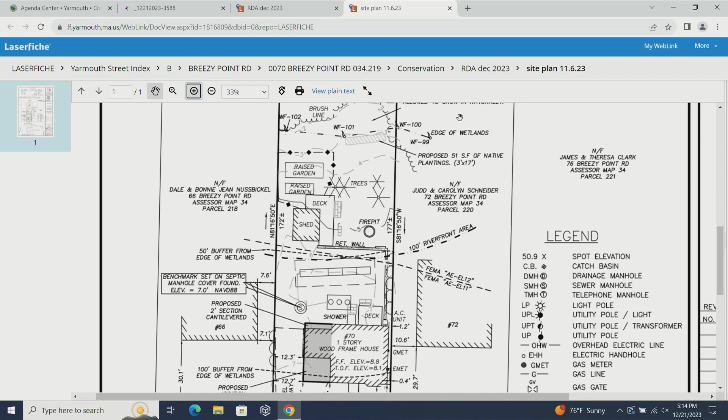We're going to have 140 square feet in the riverfront area, between the 100 and 200-foot zones. There is no proposed work within the 100-foot buffer to the riverfront. On the wetland buffer, we've got 0 square feet of proposal between the 0 and 50-foot zone, and 110 square feet in the 50 to 100-foot area.

As I said, we're proposing mitigation at 2-to-1, with 50 square feet of plantings adjacent to the wetlands at the rear of the property, over an existing lawn. There was some area in the back that was disturbed, so we're allowing that to grow back naturally. It has been cleaned out—there was some debris in there, so we cleaned that out. Other than that, I'd be glad to answer any questions you may have.

Questions from the board? Ellie? No, thank you. Brittany, anything? No questions. Anybody in the audience have any questions or comments on this project? Anybody on Zoom have any comments or questions?

If not, and there's no further discussion among the board, would somebody like to make a motion for a -2 and a -3? I'll make it. Thank you. Is there a second? Second. Thank you, Pat.

A roll call vote is required. Ellie? Aye. Pat? Aye. And the chair votes aye. Passes unanimously. Thank you for your time. Merry Christmas, everybody.

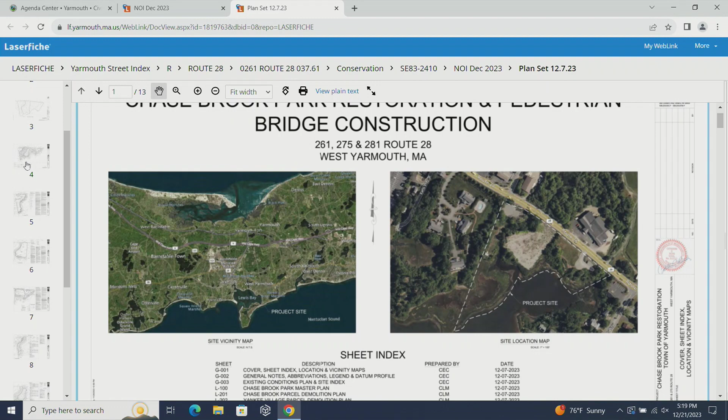We are representing the town of Yarmouth. We've been working with them to plan for the restoration of 3 separate parcels into one park, Chase Brook Park. The properties are the existing Chase Brook Park, Mill Creek Park, and the former Yankee Village parcel, which sits between those 2 parks and was recently demolished. Those are all located on Route 28, and they border Chasebrook and Mill Creek. There's a portion of Chasebrook which currently separates the 2 parcels of Chase Brook Park and Yankee Village.

Chasebrook and Mill Creek, the 2 parks on either end, currently feature existing parking areas, overlook structures, concrete and asphalt path systems which are in various states of disrepair. There's turf areas, some ornamental plantings, and naturalized edges with different levels of invasive vegetation as well as native vegetation. Following the demolition of the structures and paving on the Yankee Village parcel, which took up the majority of the parcel, that site is currently covered in wood chips, some invasive plantings, trash, and debris.

There is a salt marsh which borders the edges of Mill Creek at all 3 properties. The goal of the project is to create a more cohesive public park which utilizes all 3 of the parcels, provides better pedestrian access within the park, areas for the public to engage with and view the waterfront, as well as restore the degraded vegetation to a more healthy, ecologically beneficial state for wildlife and the quality of the waterfront. In order to do that, we created a new walkway system by removing the old walkway system.

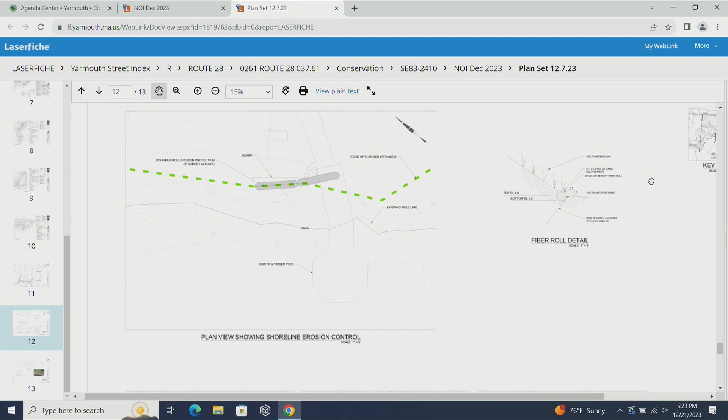In addition to the pathway system and other seating areas, the main goal of the project is to restore the currently degraded vegetated communities to a more healthy system that supports wildlife. To that end, we would be removing invasive plantings and restoring with native plantings, adding a more biodiverse planting palette that'll help attract and support more wildlife, in addition to the invasive plant removals.

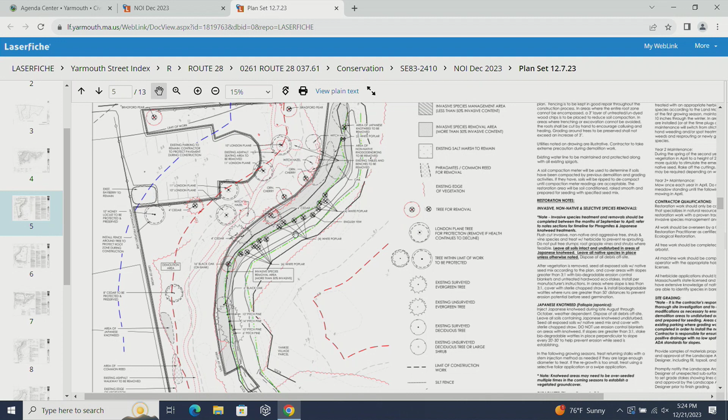The design team and committee recognize that this is a public park intended for visitors of different backgrounds and interests. One of the biggest challenges as a restoration company is that the public perception of naturalized areas tends to be that they're messy. So we tried to come up with ways to address what the public would like to see in a maintained park, while still meeting the goals of restoring the native habitat. To do that, we designated several view corridors where the taller vegetation would be managed to help enhance views in those locations.

And those are shown with those dashed lines. There's one at each parcel.

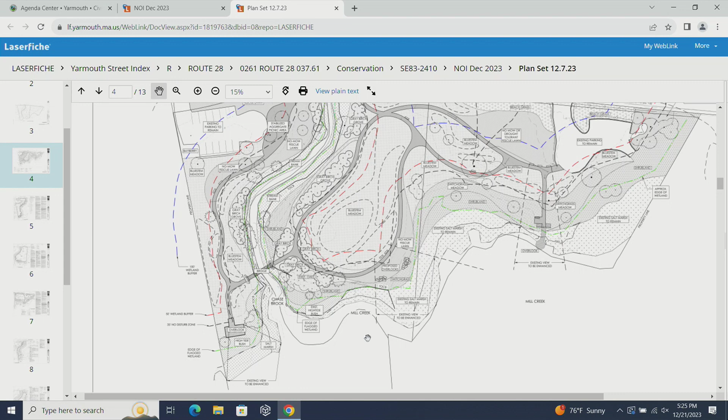Instead of a traditional turf lawn, we've incorporated a more environmentally friendly low-growing lawn in several locations using a low-growing lawn alternative called No-Mow Fescue, which is a blend of 6 different drought-tolerant fescues that don't need to be mowed on a regular basis.

Not only does this type of planting not need regular maintenance, such as irrigation, fertilization, or mowing, but those practices actually do more harm to that type of plant community than they do good. It grows very low, it's tolerant of foot traffic, and it would help provide a more maintained open feeling to some of the areas where we have the proposed walkways, picnic areas, benches, and hopefully allow for better engagement by the public within that park system so that they have areas that they feel they can inhabit alongside the naturalized areas.

This is a low budget and eco-friendly way of maintaining those areas.

Also, there's an area of turf at Mill Creek that may need restoration during the construction process. So we have proposed that damaged areas are either replaced with a drought-tolerant turf grass, such as Black Beauty, or the entire area, if budget allows, would be transitioned to the No-Mow Fescue.

And then for the rest of the park, we've created separate areas of recognizable plant community types that are intentionally layered and woven around the edges of the parcels.

For example, the existing salt marsh has Phragmites in it. The Phragmites would be treated and mowed. That would help the health of the salt marsh. It would also help the public perception of what this looks like aesthetically.

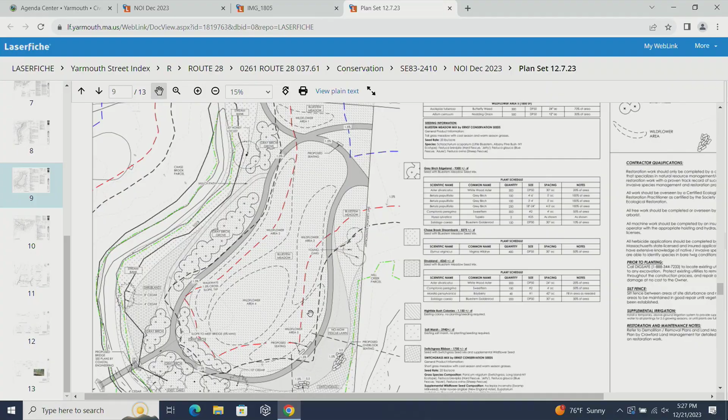And I will let Tori from Coastal Engineering present the pedestrian bridge design and add any other comments that he might have.

Currently, we're proposing to do a bridge with a 40-foot span that's only 5 feet in width. The idea is to keep the bridge as small as possible so that it is not getting in the way of any of the views, and used only to connect the pathways.

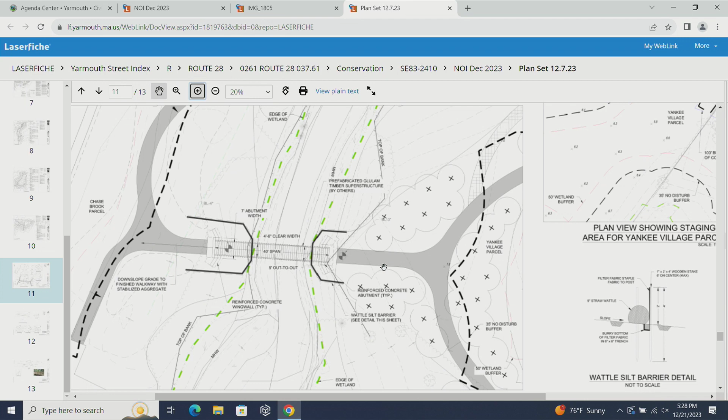That's really it, other than unless you have any questions.

What was the resource area that's in? Is it BVW? Salt Marsh, Coastal Bank, Riverfront area. The bridge is over Salt Marsh?

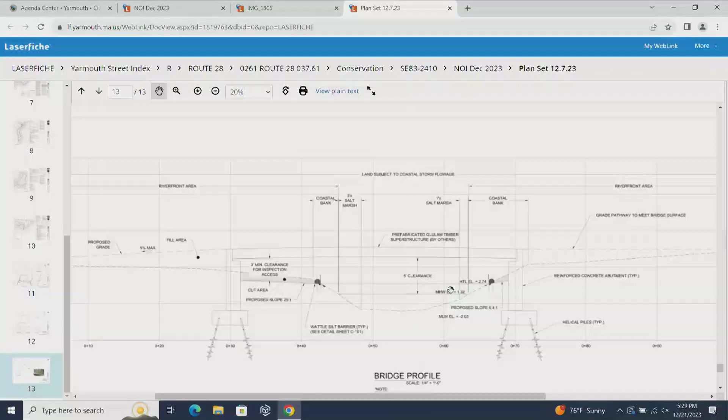Yes. Okay, and what's the profile for that? For the bridge? What's the height of the bridge? The clearance, let's say it's 5 feet over the mean high water to the lowest chord.

Can you explain how the pathways have been brought up to meet the bridge in order to get that clearance? On the left side, we'll have to add some fill to bring it up to meet the bridge. On the east side, it'll come straight across to meet it, but it'll also require some additional fill.

We're not going to grade anything outside of the pathways with anything other than what is being proposed for the rest of the lawn. It'll maintain the 5 foot.

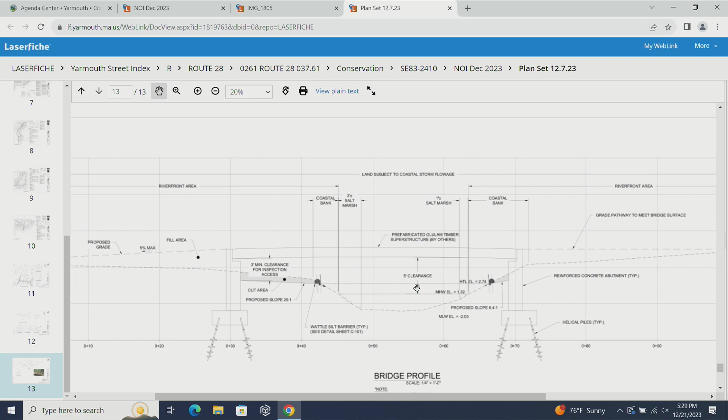I think it's actually probably stabilized aggregate, meadow, and then embankment plantings. So there's proposed blanketing on any of the steep bank areas that are existing, but there's no proposal for additional.

I think you had asked earlier about gravel. There's no proposal for gravel on the banks.

Okay, and the decking of the bridge is just planks? Yes, wooden planks, yes. Okay.

So we are proposing that the spacing only be a 1/2 inch to be ADA compliant. That's the requirement? We would be requesting a variance for that. Okay. Yeah, because normally we would ask for 3/4, but if it's an ADA requirement, then obviously we would have to go with that.

Yes. There's also a southern exposure there, so we're hoping that that would help. Yeah, you're a lot more beneficial that way. Yeah. Okay.

And what was the name of the lawn mix you're talking about, mill? It's called No-Mow Fescue. It's Fescue by Prairie Nursery.

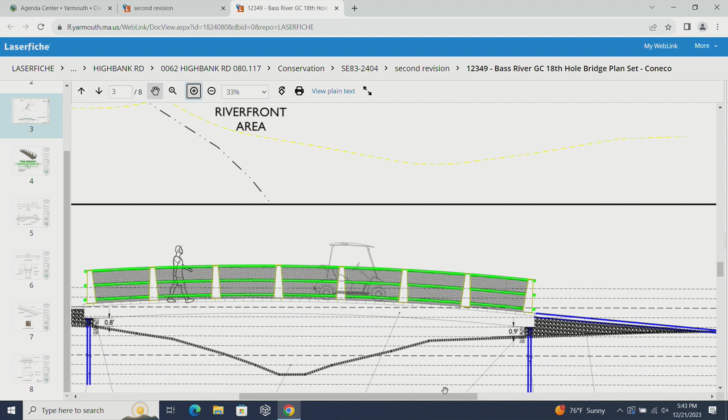Because of the height of the bridge, we also had to add railings on the side, since the bridge is high enough and narrow enough that we were concerned about cart paths going across. As you can see in this diagram, on either side of the bridge is where it meets the existing path—actually over the existing path and up into where the path was before, because the old bridge wasn't 48 feet long. This one is.

So we're actually meeting the path further upslope, and we're doing a fill on either side of the path so that we bring the path elevation up as you come down from the tees and go up towards the green, to meet the new bridge elevation.

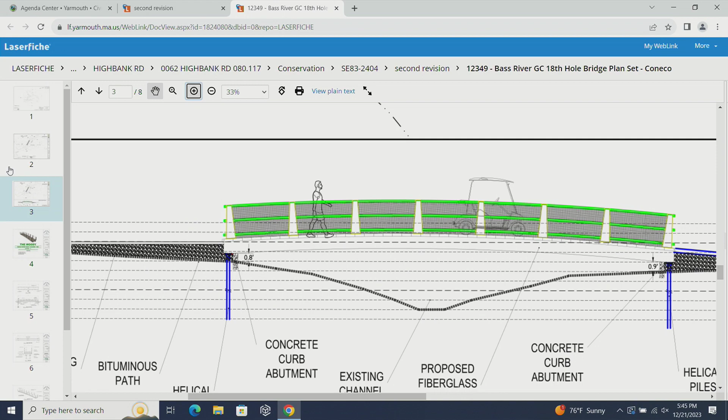We'll have vertical curbing on either side of that path, because there's a drop off, especially toward the green side—about a 3 or 4 foot drop off coming off the bridge. We didn't want to just splay out a 2-to-1 or 3-to-1 slope fill, so we decided to go vertical. There will be curbing so carts don't go off the side, and that'll also retain the path material. The path is in previously developed Riverfront.

We're on the existing path. We're not expanding beyond what was previously developed. We're no closer to the river—matter of fact, we're further away. We've also proposed to take out some paths that become unnecessary because of the bridge crossing going back in, and restore those with native vegetation, all within Riverfront.

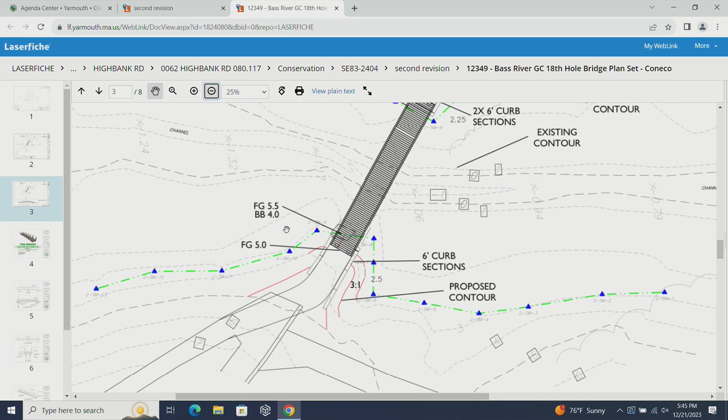Okay, questions from the board? The paths that you're taking out, what were they composed of?

One is a gravel path, another is partially seashell, and there's a little piece of bituminous concrete too. In the letter I wrote, I detailed the total length of the path—it's quite a distance. As I recall, there was some area of path coming into the bridge where underneath there was concrete or bituminous asphalt paving. So the approach coming down from the tees to the bridge has asphalt on top right now.

Yes, we're actually going to go back and meet it further along. So there's going to be a piece of area where there was asphalt before that won't be there now because it's under the bridge—we're going to meet it further upslope. The other side was always seashells or gravel, and we'll maintain that.

Anybody else? Ellie, any questions or comments? No, I don't have any questions, thank you. Okay, Brittany?

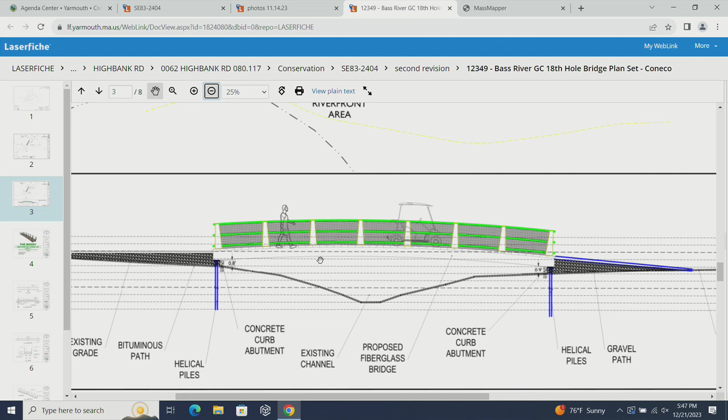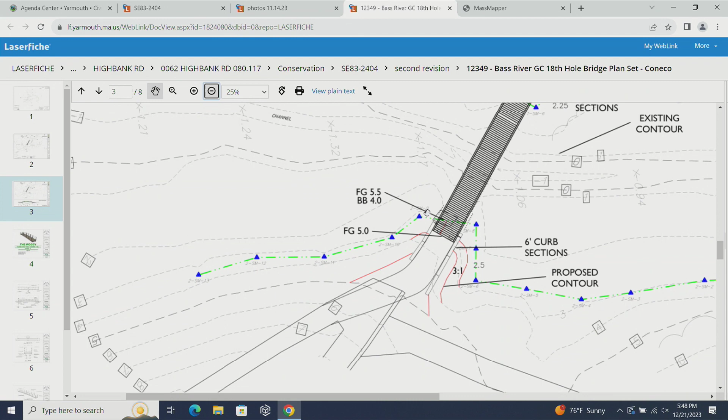If you go back to that diagram for a second, you can see where the salt marsh is and where the bridge is—see the blue triangles? So the bridge ends are actually outside of the delineated salt marsh area. And if you recall, some of that salt marsh vegetation is sitting on top of bituminous concrete right now, because it was previously filled for that seashell pathway.

And for the slopes, the 3-to-1 slopes on either side, are those going to be seeded and blanketed, or how are those going to be done? Yes. I didn't see that in the description. Okay. Tim, the landscape architect, is also on Zoom if you want to talk to Tim Garish.

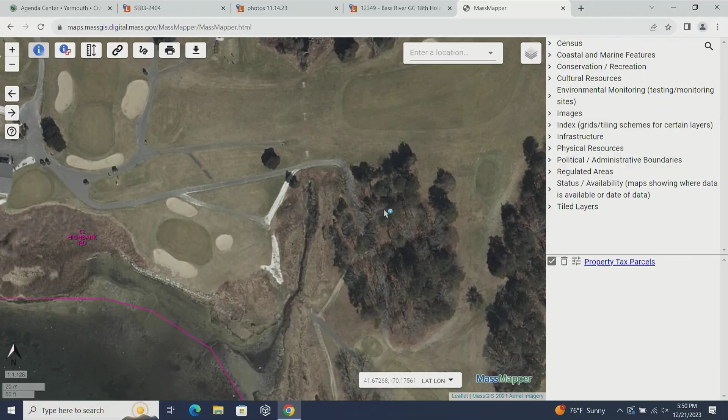We've been fortunate so far that no one's been injured severely, but it's a requirement that we try to improve golf safety on the golf course. So it's a really important issue to resolve.

In addition, those paths were created to try to alleviate the problem when the bridge was destroyed several years ago, which delayed its return. Most of those paths are going to be reclaimed, so they'll go away, and that will allow you to get back a lot of the areas along the sides of the marsh.

So we would appreciate it if you would take all that into consideration. It's a real big improvement and a real big safety feature to protect citizens and golfers in general. Thank you. Okay, thank you.

Anybody else? Anybody on Zoom who wants to make a comment on this project, raise your hand digitally. Don't see anybody. All right, is there any further discussion among the board?

Okay, would somebody like to make a motion to approve the project with special conditions? So moved. Thank you, Pat. I'm having pen problems here. Did you second, Jack? Thank you.

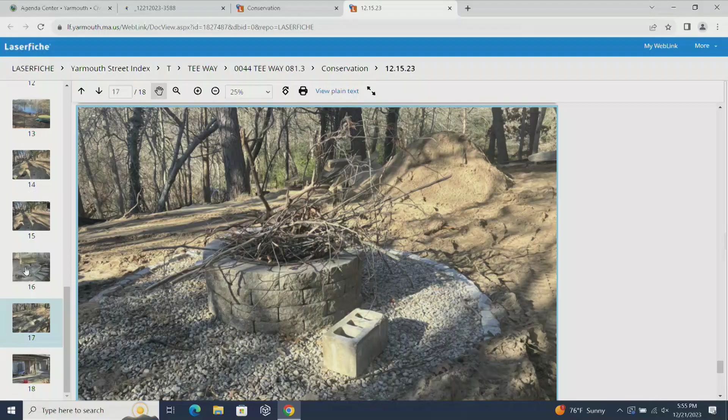There was a report to the building division about this violation, which is how conservation found out about it. This is located right abutting the golf course, to the north of the golf course on the pond there. The homeowners had a failing timber retaining wall, which they replaced with stone, and same thing with a failing timber stairway, which they replaced with stone, as well as installation of a patio.

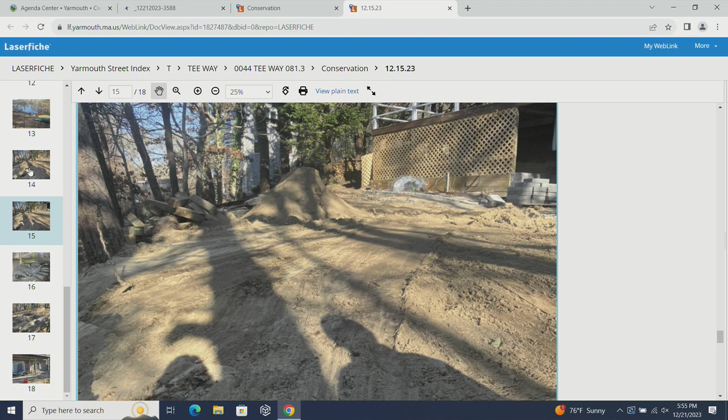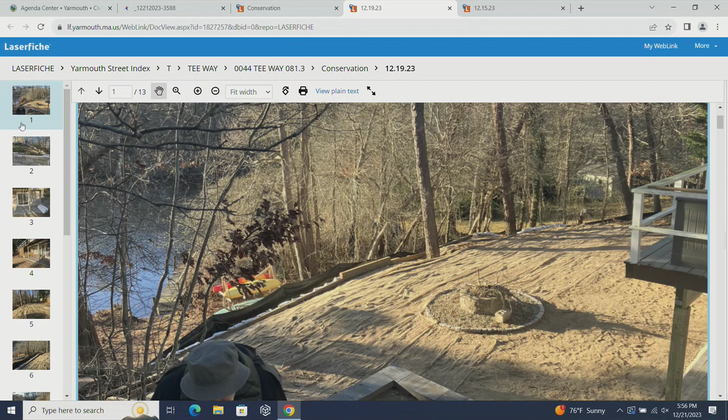This is all within the 100-foot buffer zone to a bordering vegetated wetland and the pond there. They also did some regrading in the yard, which led to a lot of exposed soils, and historical cutting could be seen on the areas below. I met with them on site during the installation, and over the weekend before those big storms, they were able to install silt fence as erosion control, along with some jute matting on those open soils.

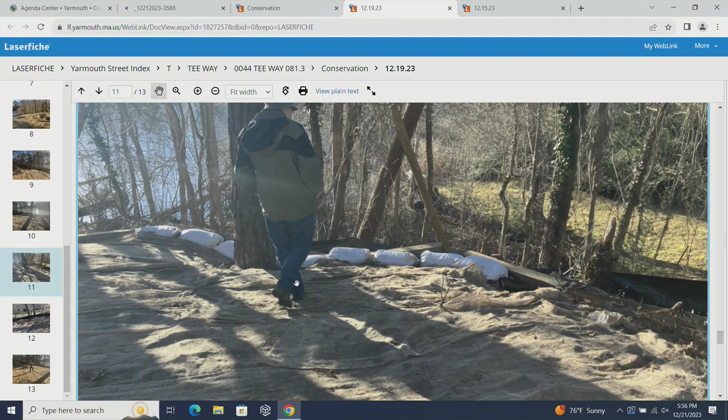There is a smaller retaining wall at the bottom of the slope here before the stairway. Let me see if I can find that one. Right at the top where the silt fence is, right underneath it, there's a small wall with two timbers holding that slope up, and that was installed last year.

I will find it. It did not look like... yeah, I was going to say, it looks like this, it's got a lot of holes underneath it, where it's been undermined and recently installed. So that's what's going on at 44 Tee Way.

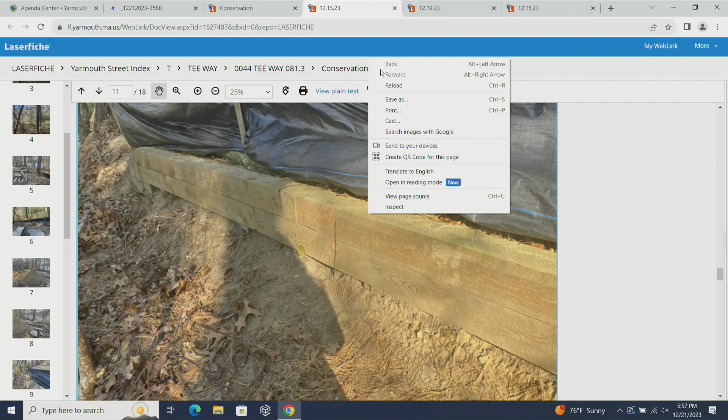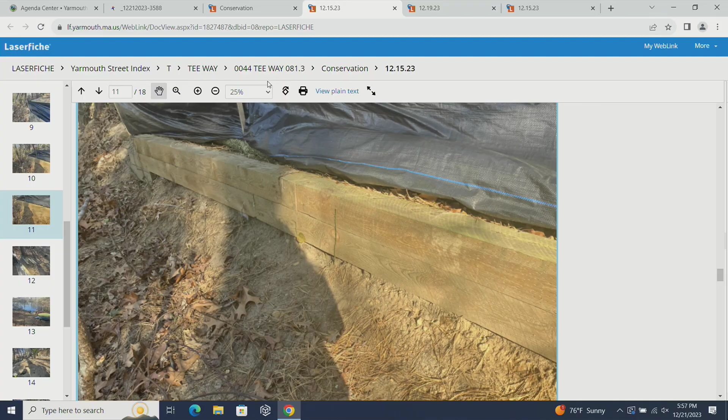Seems like you'd have to do a little bit of engineering to help that lower wall along. You might have to add another course or two, step it down in front slightly, I think, because otherwise water will run under it.

It's clearly not structural, and it doesn't seem like it's holding back a huge amount of soil, but I think if they planted on top and in front of that lower retaining wall, that would be something we could permit.

I think you'd also want to address this, because it looks like some pretty bare stuff all the way down between the pond and this lower wall here. So I think that certainly needs to be restored, that area should be restored.

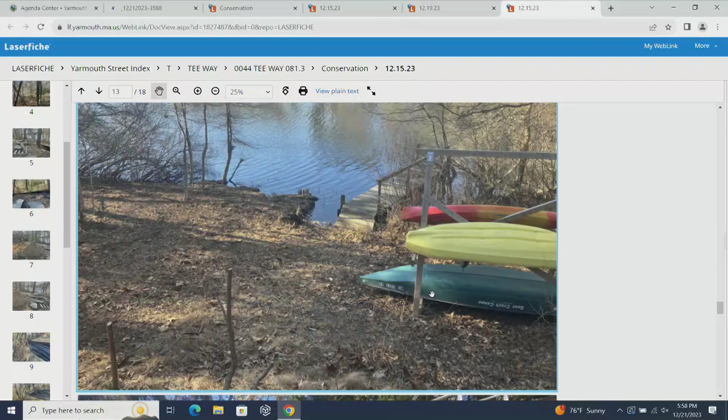I can still see keeping a path in there to go down to the dock, and I would imagine the pier is not permitted at any point, but it looks like it's been there for quite a while.

So I'd like to see some sort of a plan, like a plot plan, or I could get a surveyor to do a plan for you, but put everything onto one plan. Plant the 35-foot, restore the 35-foot, allow for a path to go through it so they can access the pier, and then permit all the other stuff in the 50 to 100 - the fire pit, the walls and everything else that were done within the 50 to 100.

Through an RDA? I would do it after the fact RDA, just to put it on a plan so we actually have some sort of record. And then with the understanding that any work that gets done beyond that within the 100-foot has to come back for proper permitting before, they can't just continue to do things then do it after the fact.

So the RDA would include the planting plan for everything? As long as you're good with that - yeah, instead of a restoration plan under the enforcement order, just do the restoration planting under the enforcement order, but the restoration area should be put on that plan as well.

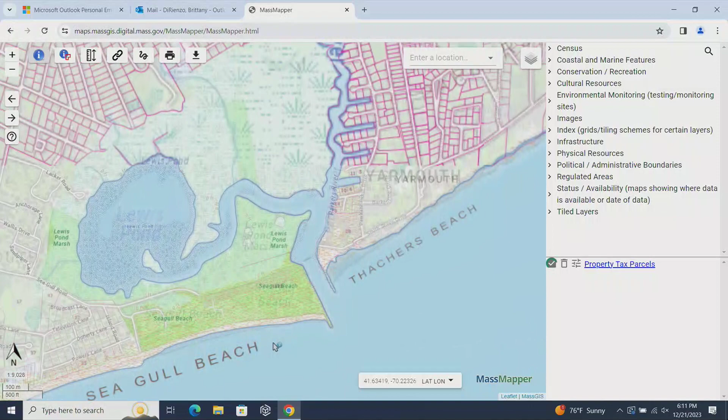I don't have an issue with you bringing the beach rake out on the berm portion of the beach, but where Brittany's got her pointer right now, I would not like to see any kind of skid steer, front end loader, bobcat, anything like that. I think that's just asking for trouble. So for the rest of the beach, I could see using the beach rake, but for that area right along the walkway, I think you're just going to have to hoof it out there with hand rakes. I realize it's a lot of work, but I don't want to see any kind of machinery over here.

So in the larger areas where we can use the beach rake, that would be fine, but adjacent to the walkways we'd do more manual removal. Anything within the walkways and off the walkway to the west, that protected area—that was the area inside the walkway to the west where we had all agreed the plants had grown in, so we're not going to rake that. I'd say do that part with hand tools as well, if you need to.

Although, who knows—with some good winds and a good tide every once in a while, that might go away over the course of the winter.

Well, that's our concern for that higher area. With the rake, I don't have an issue there, but our concern is just where the water placed this up by the walkway—it's really not going to leave by itself. Between the walkway and, over the summer, this area got colonized by plants. So we don't want to really damage that—the dune is kind of migrating there, so we don't want to damage that area west of the walkway.

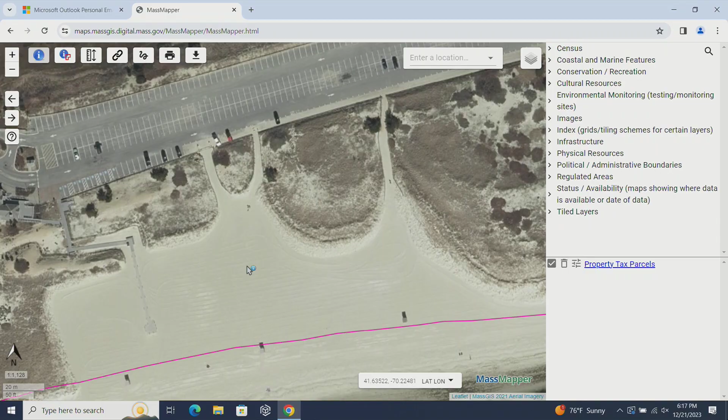And the access is through this gated wide pathway for the machine? Yes. Okay, Ellie, I'm sorry, did you have any comments or questions? Yeah, I have a comment.

I understand why they want to remove the seaweed around where the walkway is for removal of that, but wouldn't the seaweed on the other part of the beach where they're proposing to rake, wouldn't that help stabilize it for the winter, for any other storms? It would stabilize the sand and have it build up, and then have more build up. If we rake it, it sort of becomes a barren area where the sand can blow around. Wouldn't you want to keep it there? Nobody's there sunbathing in the winter. I can understand it in the summer, but to me, I would just leave it there and let Mother Nature keep the sand. That's just my thought.

I mean, it is an excellent point. Yeah, I wouldn't disagree with you. I guess I'm not going to argue, I agree. I do understand it around the walkway because they have to do maintenance there, but nobody's sunbathing, nobody's complaining about it. It's not gonna bother anything, and it may help the birds in the spring.

Yeah, the only thing I get concerned about is if we leave it like that over the winter time, and I'm with you on it, but if we leave it over the winter and more sand gets deposited on top, my only concern is, are we going to have an issue in the spring when plovers and terns are starting to come back, and then people are going to be walking and sinking ankle deep in it.